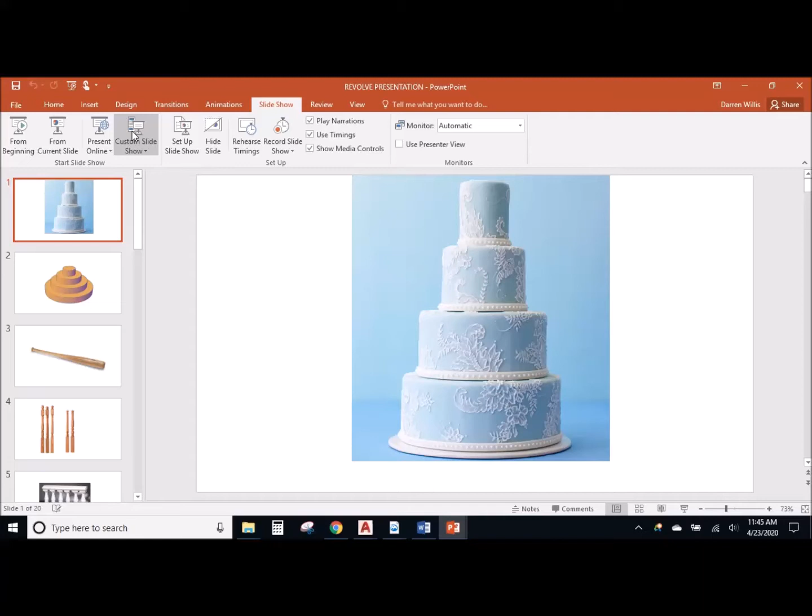Welcome to our discussion on revolved models. And what I wanted to ask you to get us started is, what do you think? Do you think it'd be possible to model the basic shape of this using the tools you already understand and know how to use? For example, you know how to extrude. So could you make the basic shape of our little stacked cake here, our wedding cake, with extrusions?

You don't have to worry about the frosting and the lacy looking stuff. I'm just talking about something like this. Would that be possible to do with extrude? What do you think? Well, if you said yes, you're right. You could do this with extrude. All right, so let's talk about it.

We could hop over onto model space. We could draw a circle with a 6-inch radius. And we could draw a circle with a 4-inch radius. And we could draw a circle with a 2-inch radius. And we could draw a circle with a 1-inch radius. Right. And you know all about extrude.

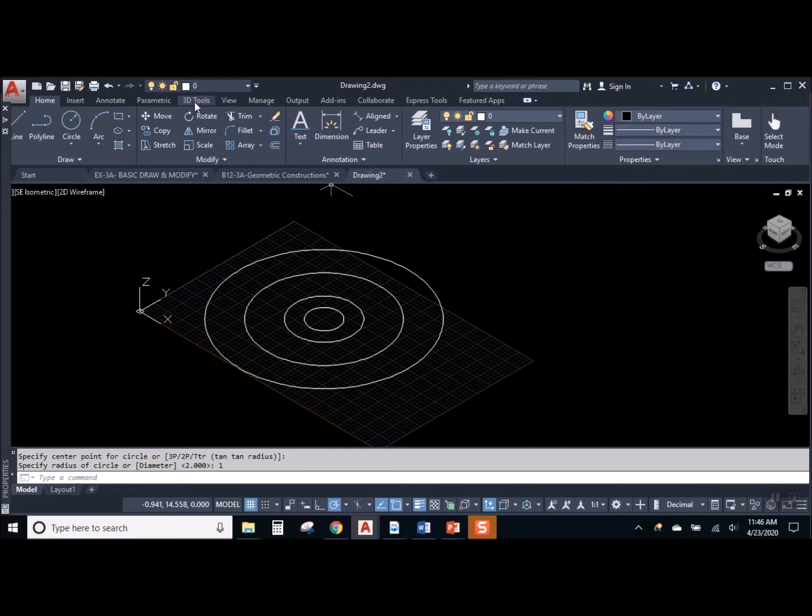So you can go in there and you can pull this guy up nice and tall. And then you could pull up the next one nice and tall, and the next one, and the next one, and we could create this basic shape and this basic idea with 4 extrusions.

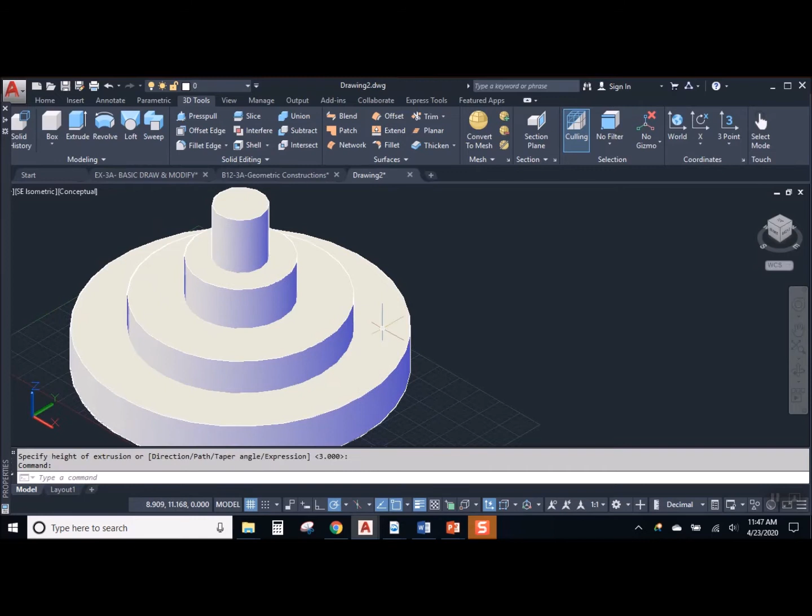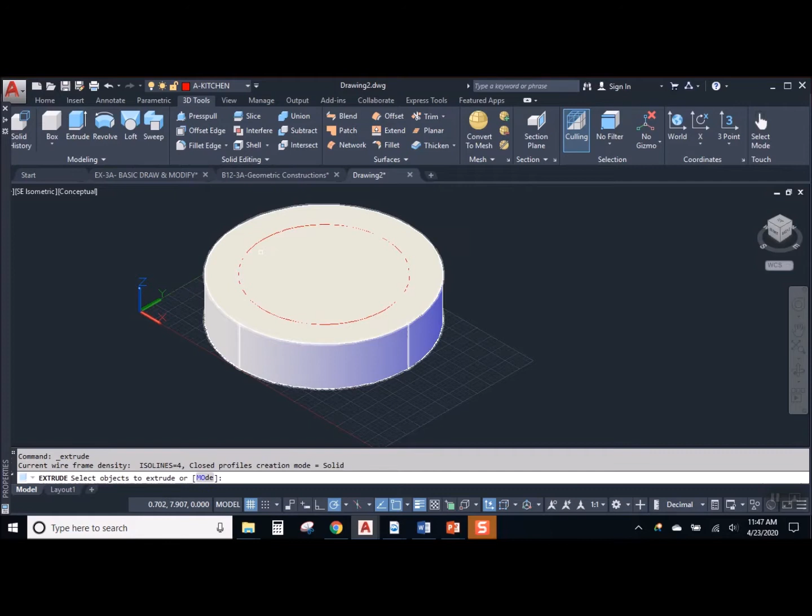Or maybe if you didn't like that, you would start off with the lowest level, just like a baker, right? And pull it up, and then maybe we go in and draw another circle on top of it, because you can do that, right? We could go to the center and draw a second circle and extrude that one up. Okay, and build one on top of the other.

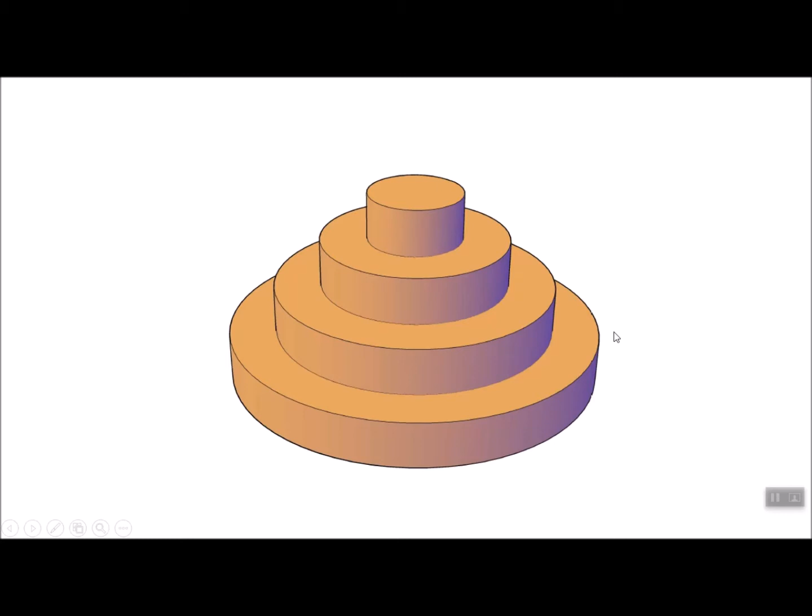So the fact is, yes, you could do this. Okay, this is not an impossible task with the technology that we have. But it's not the easiest way to make a shape like this, because this shape is kind of special. This shape is called a revolved shape. If that's the first time you've heard that term, revolved, that's okay. Revolving allows you to make shapes that are not possible to make with extrusion.

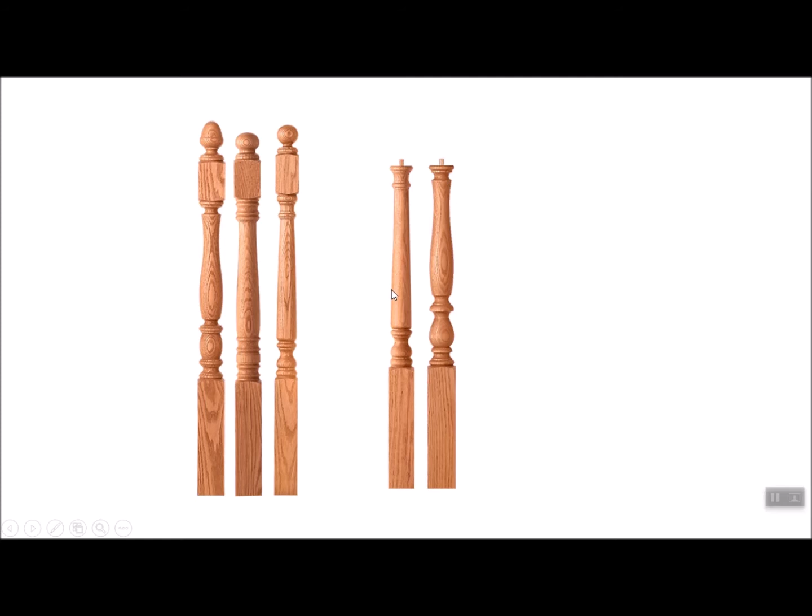For example, the baseball bat here. This shape has an axis going through it, and it has the same curve and profile all the way around, making it a revolved shape. Okay, you can't extrude this. There's no way to make this with extrusion. The curvy parts of these balustrades too for a railing, same idea. It would be impossible to make the curvy parts with extrusion.

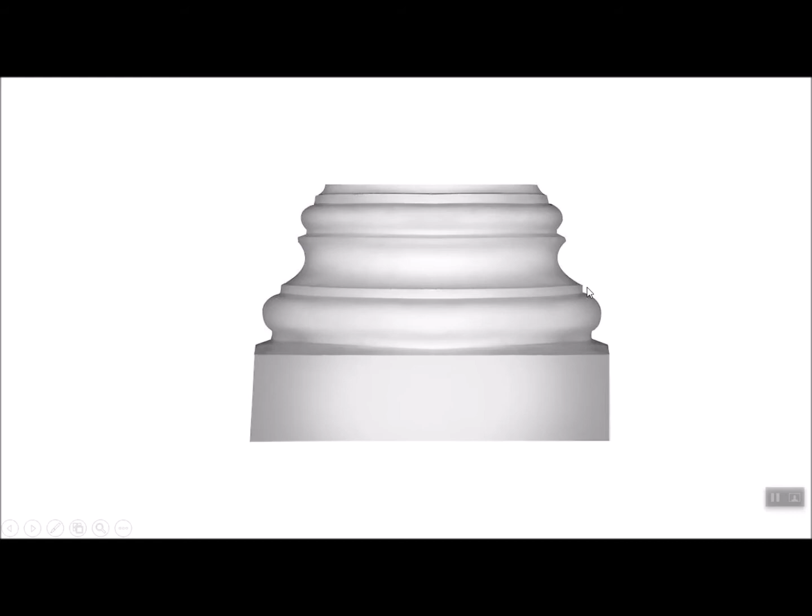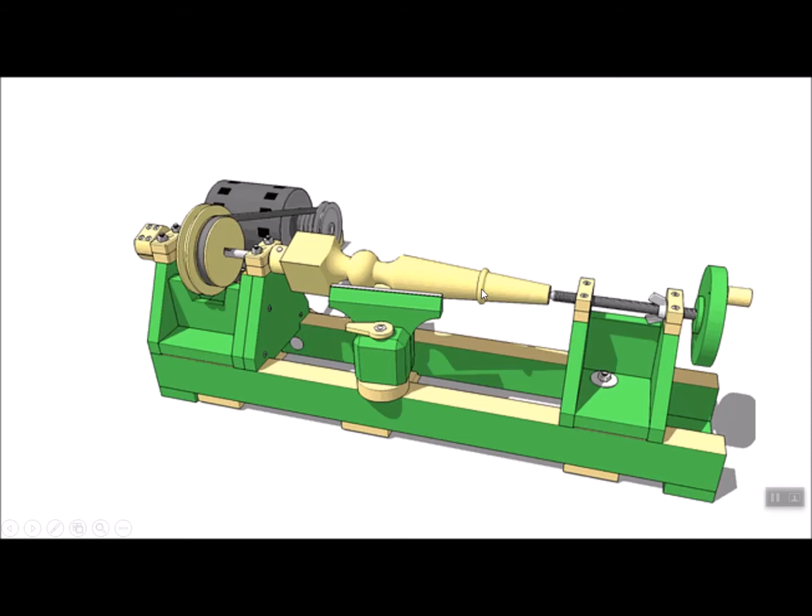So here's the basic idea. You could take a tool called a lathe, and a lathe spins around a piece of wood or a piece of metal and allows you to carve a revolved design into that piece of wood or metal. So we think about like a chair leg, right? That would be an example of this, or any of those other things we just looked at.

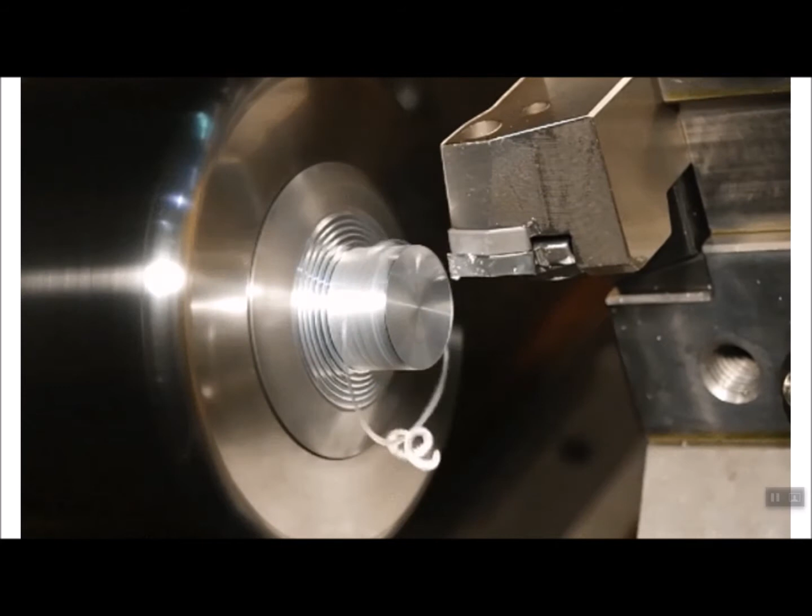Here's a lathe in operation. We see the metal is spinning on the left side in a chuck, and a cutter goes in, and then one pass at a time carefully removes material, creates some cool looking little chips, and then when we're done, we get the final shape we were looking for. These are all revolved shapes, meaning they have an axis of revolution through their center, and they have the same contour all the way around.

Okay, so the term revolve refers to the tool, a lathe, which revolves a piece of stock so that it can be cut into a different shape. There are other manufacturing processes that mirror this too. Think about glass work. Have you ever seen anyone blowing glass? Like making something out of glass?

They heat it up on the end of a tube, right? A piece of glass, a big chunk of glass, and then they spin it and blow into it. And as they're doing that, it creates the hollow of the glassware.

Okay, so these are all shapes that are not possible to be made with extrusion, but can easily be made with a revolving process. Even the sphere. You can't extrude a sphere, but you could take a circle and spin it around and turn it into a solid. Okay, so what we want to talk about is how do you do that? How can we accomplish this? And let's talk about using a new modeling tool in AutoCAD to get this done.

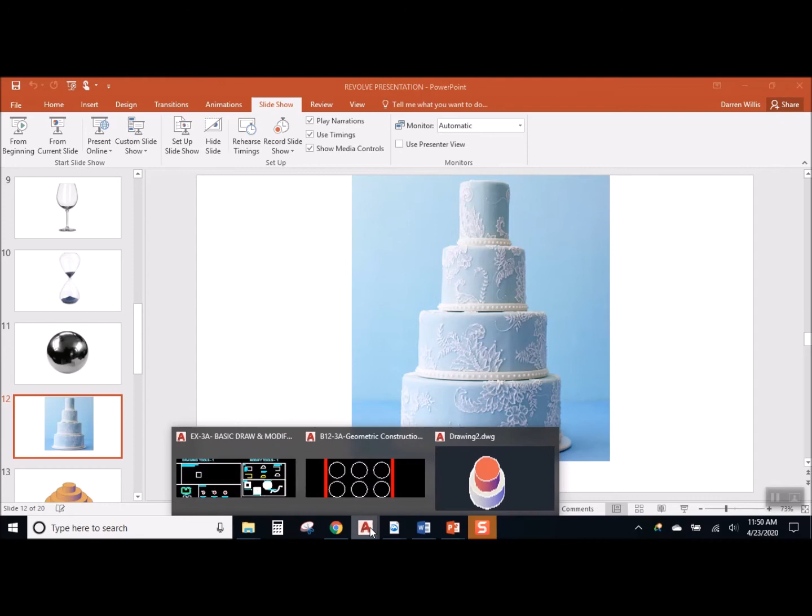So the modeling tool is not going to be Extrude. It's going to be the tool right next to Extrude. It's called Revolve. Okay? And probably the best way to start working with it is we are going to think about what's the shape we're trying to get and what do we need to draw. So looking again at our wedding cake here, what's the shape we're looking for? Well, it looks like 4 steps, right? And on the other side, it looks like 4 steps coming down.

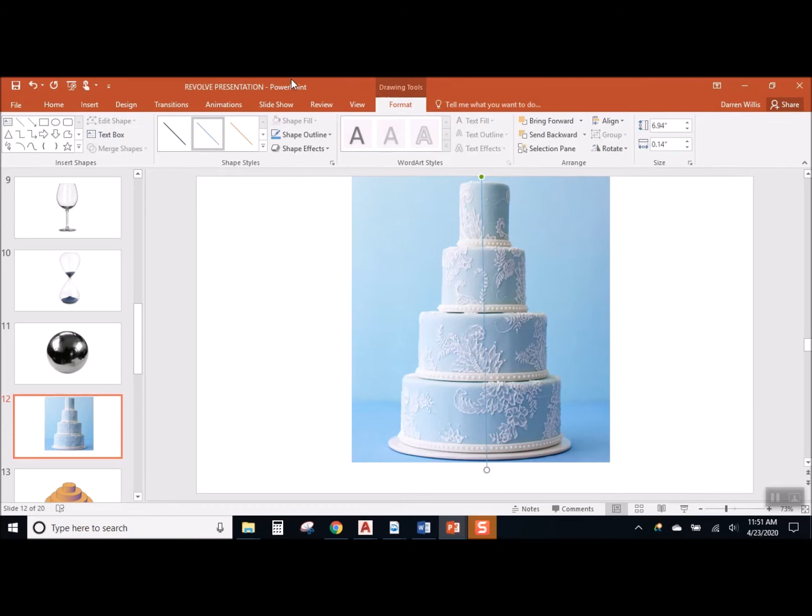But the reality is we don't need that whole shape. We only need half of it. Okay? And by half, here's what I mean. Draw a line down through the center, and then draw half of the shape you want. Because think about it, that shape is going to spin around, right? So we don't need to draw the whole thing. And actually, if you try to draw the whole thing, it'll mess you up.

So with a polyline, let's start drawing. And don't worry about sizes so much, let's just work with the concept. Let's make 4 steps, right? And if you have to go back, that's fine. We just want to create a closed polyline that defines half the shape we're looking for.

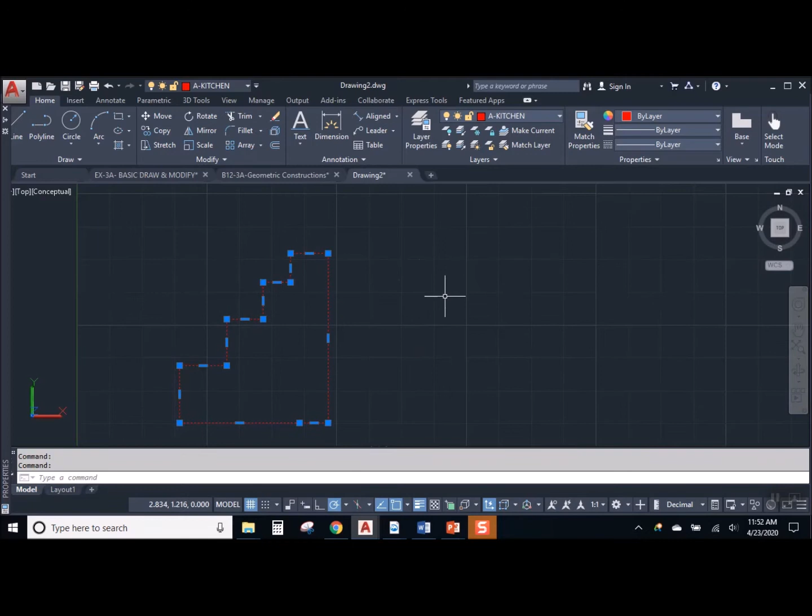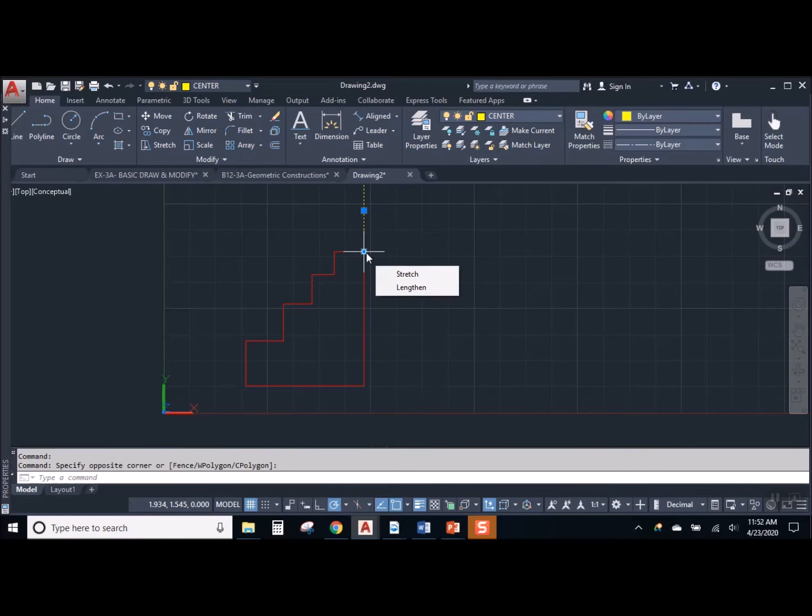Okay, and then sometimes what I like to do is add a center line. A center line is a good thing to have because it reminds you of what you're going to use for your axis. So this is half of the shape of the wedding cake, and this here is the axis. I'm going to spin that shape around. Okay, and then looking at it in 3D, we'll be able to fully appreciate this. I'm going to make a copy of it.

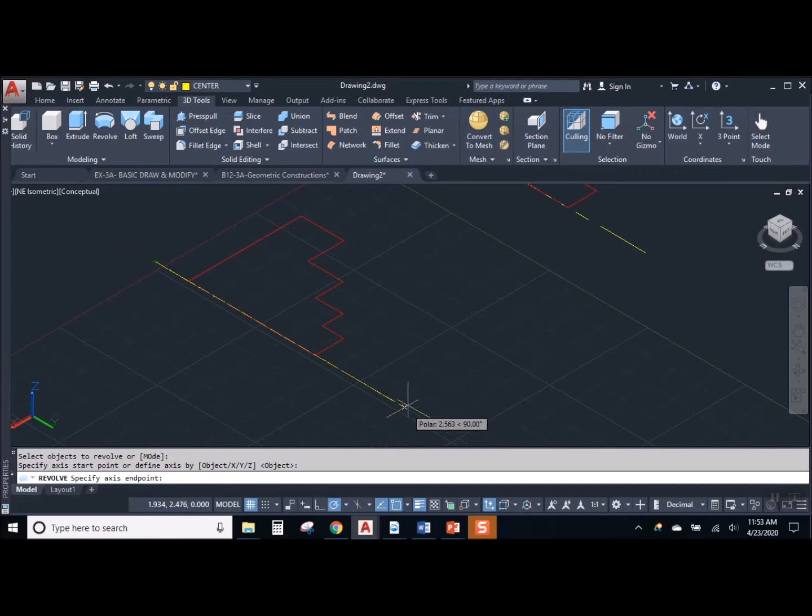I'm going to go to my 3D tools and I'm going to revolve. I'm going to take that shape there, enter, and then it asks what axis do you want to revolve around. So that means I need 2 clicks. I'm going to click here, and I'm going to click here, and do you see what I'm getting? Yeah, so it's going to create a 3D solid using that profile and spinning it around that axis. So I'll just hit enter because the default revolution is 360 degrees. And hey, there's my wedding cake.

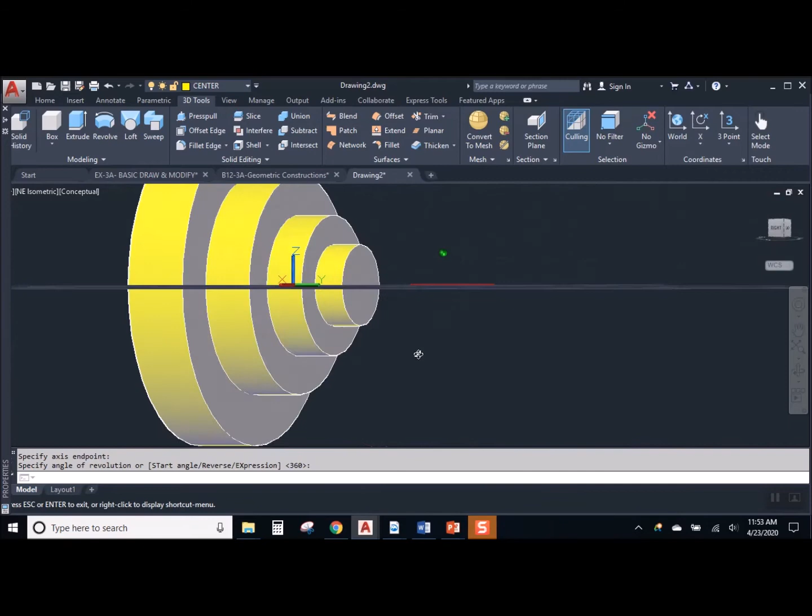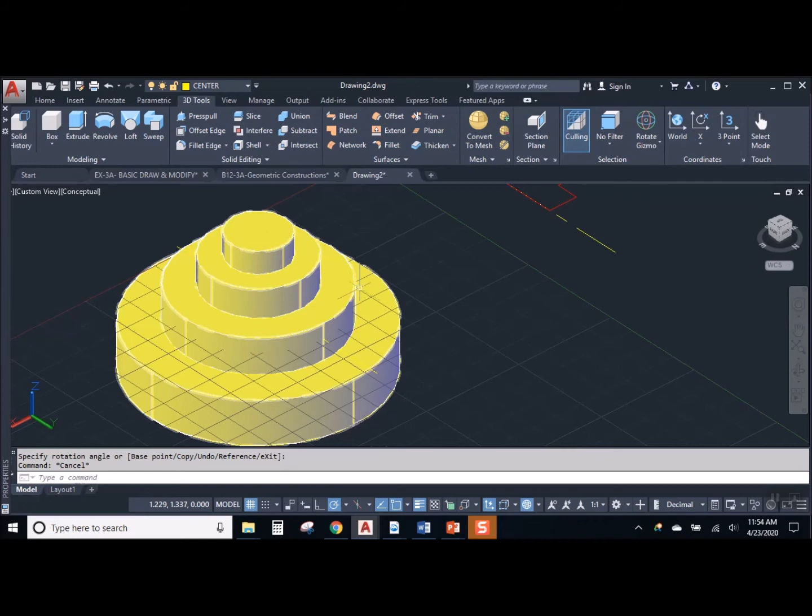Pretty fancy, right? Now, if it's in the wrong orientation, that's fine. Just turn on your rotate gizmo and then you can stand it up. And the idea is this is less work, right? Because before it took 4 different circles and 4 different extrusions to create the wedding cake. What did this one take? Well, it took 1 profile, 1 axis, and 1 revolution. So it's a better way to work if we're creating shapes that have a revolve profile.

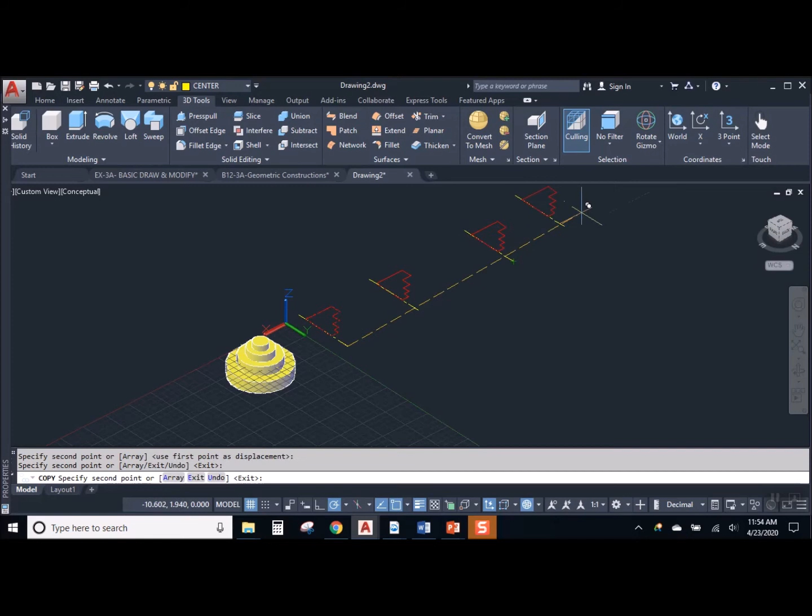I'm going to copy a few of these, because I want to show you that revolution is really a powerful tool. Making a revolve is a really powerful way to model. That's the object I want to revolve. That's the axis I'm going to revolve it around. Okay, and we get this for our result.

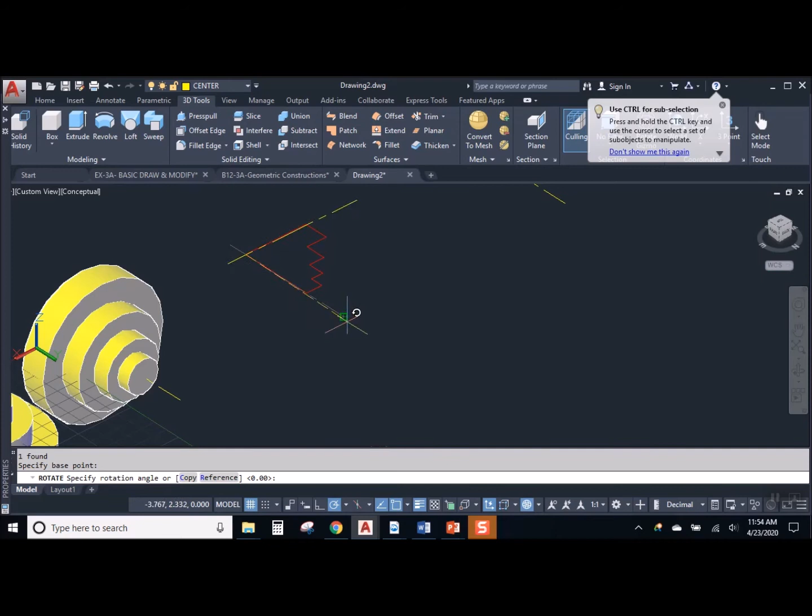Now, check it out. Imagine I took my axis and I moved it. Okay, instead of revolving around this edge here, I'm going to revolve it along that back edge there. Will I get the same result? Let's take a look.

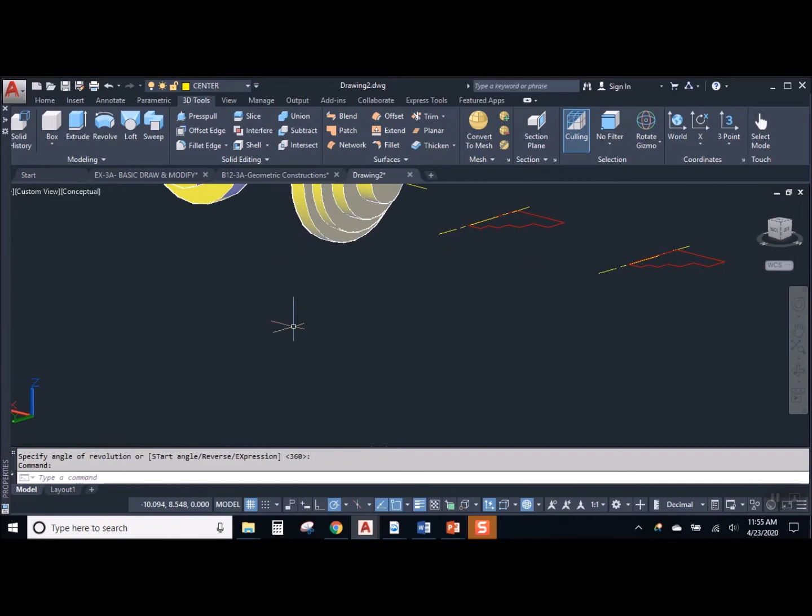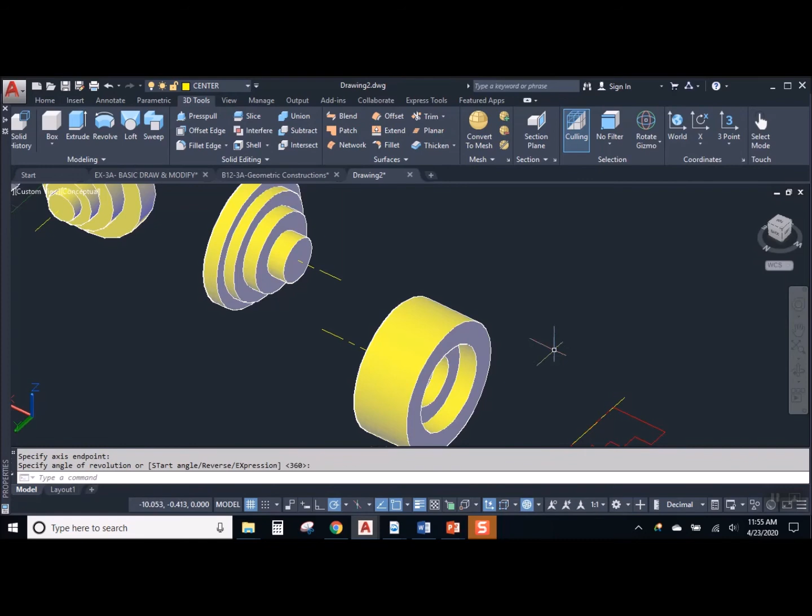See, I get kind of the same thing, but different sizes because now it has a different axis. Okay, and then think about what if I took my axis of revolution? What if I rotated it up here? Right? What if that was my axis? So I'll revolve that shape along this axis. Whoa, that's massively different, right? It's still got steps, but now they are going in. They're concave. Cool.

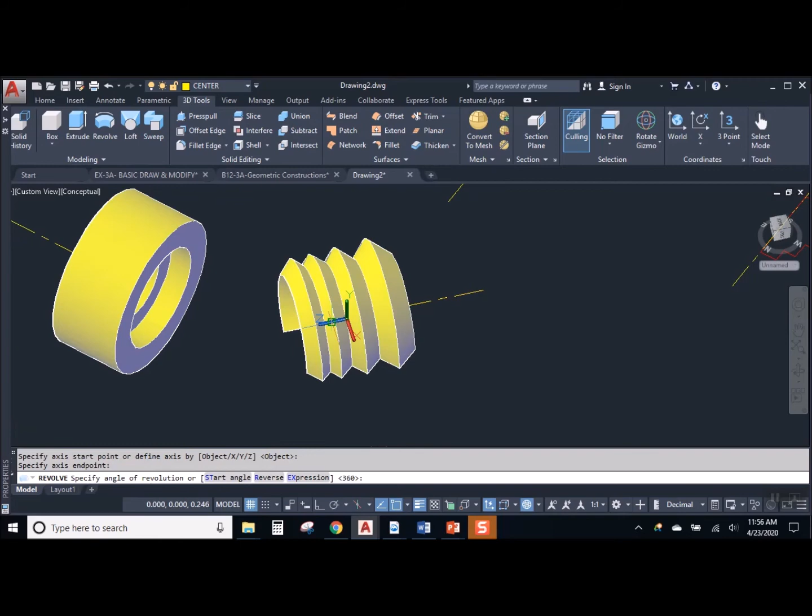And now, if I took that axis, and again, I just love doing this, so I'm going to make a couple more copies. What would happen if I took this and I rotated the axis at 45 degrees? Right, 45 degrees. And we'll do an REV, revolve. We'll revolve on these 2 points for the axis. Now that's cool, right? That's something totally new and different.

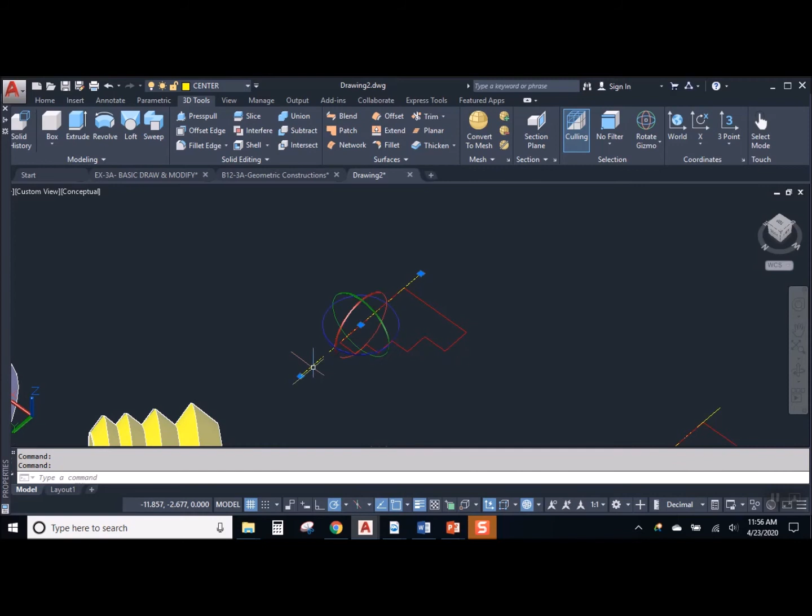So the axis is critical to the final product. All of these use the same exact profile, but we're getting massively different results by varying the location of the axis. Now here's another one. This time though, I'm going to move the axis. I'm going to move it away from the object. Okay, now think about this. It's still going to revolve, but it's going to revolve using that as the axis. What do you think is going to happen when it's done? Am I going to get the same result that I got here? Let's see.

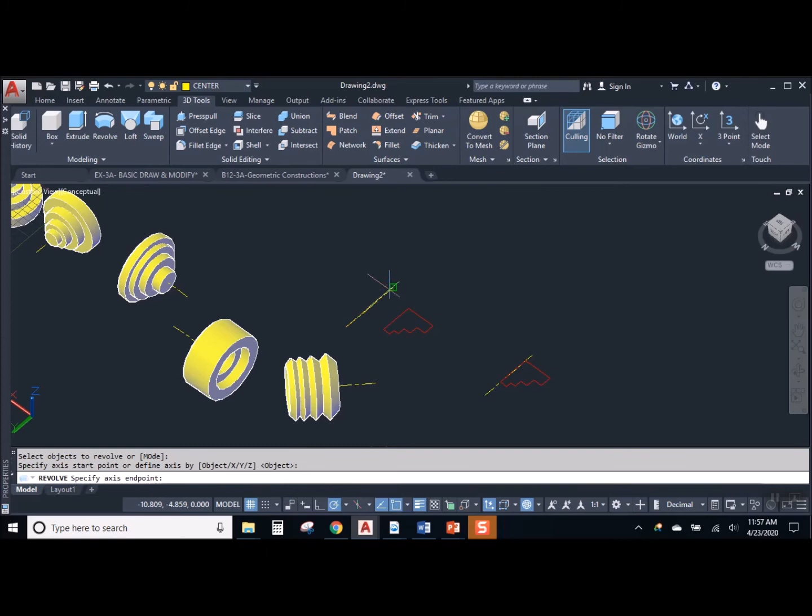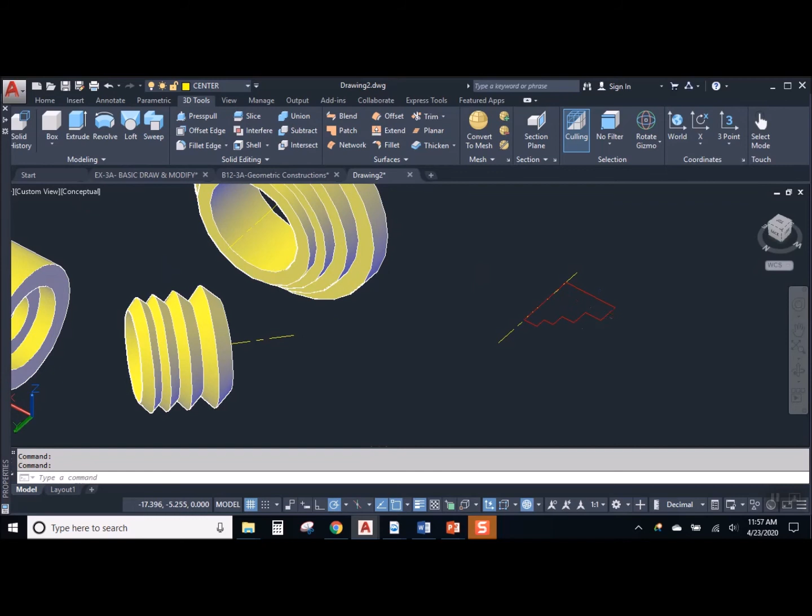Okay, so now this time, there's a big hole in the middle. Well, why is that? Well, because the axis was not touching the edge of the profile. So it leaves a gap. Alright, so that's a revolve with a space between the axis and the profile. So revolve is a very cool tool. Lots of awesome stuff we can make out of it. Why don't we play around a little bit with this, okay? Why don't you go in and let's see if we can make some stuff using revolve.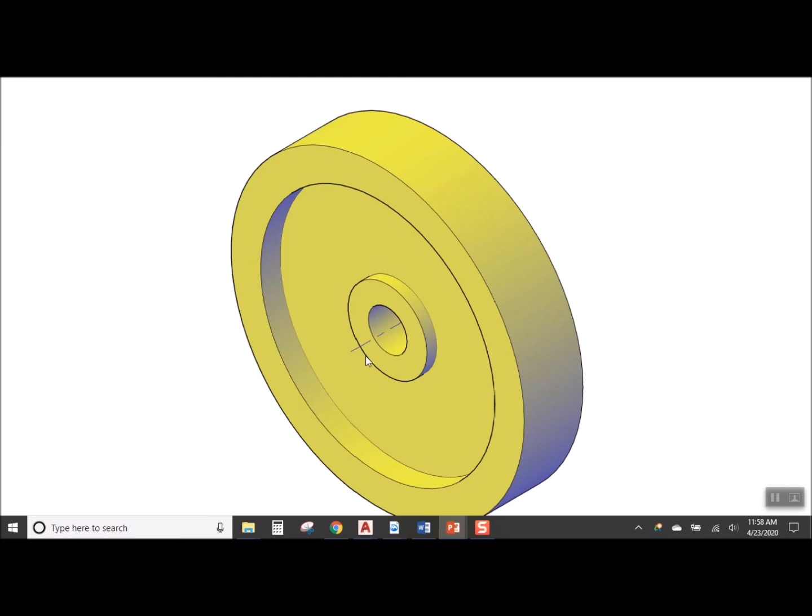So if you're kind of drawing a little bit of a blank, that's okay. How about something like this? This is the center of the revolve, the axis. There'll be a gap between the axis and the edge of the hole. That's the edge of the hole. Then there's a small raised section, a depressed section, and a larger raised section. So it looks like the letter I sideways, right? All right, let's try that.

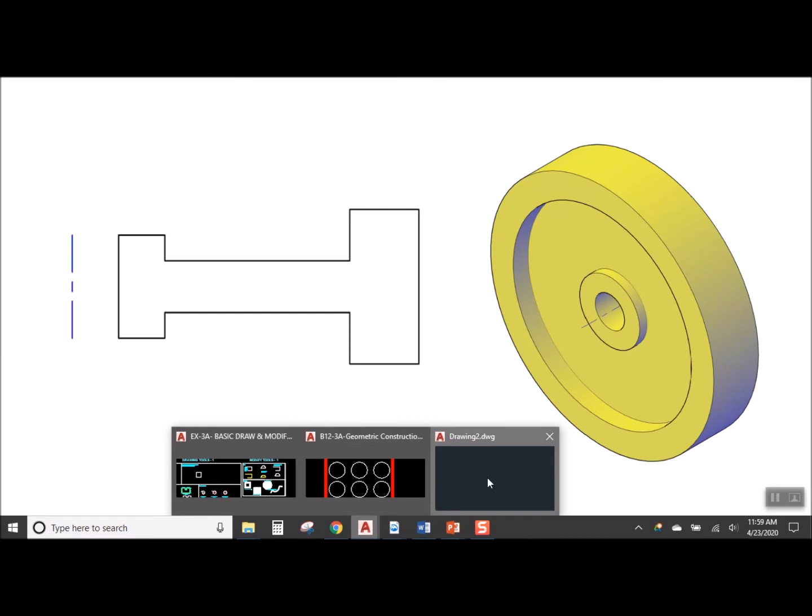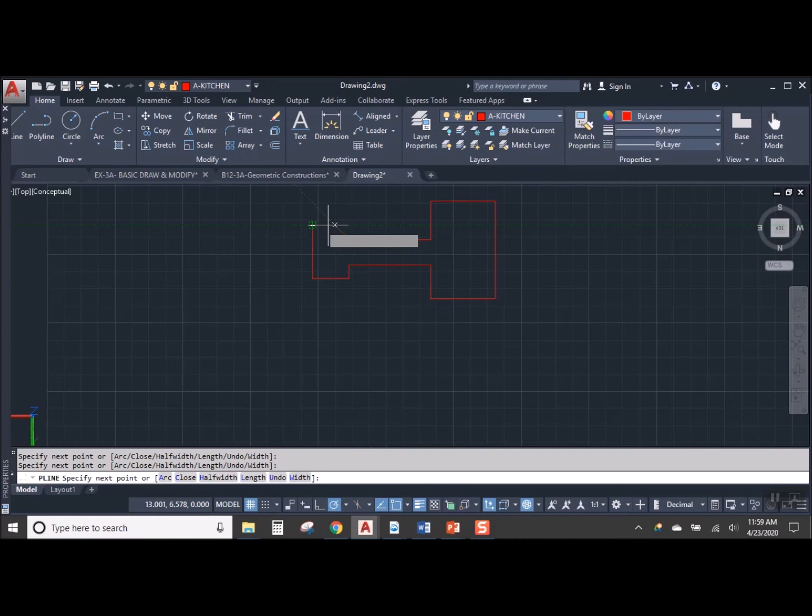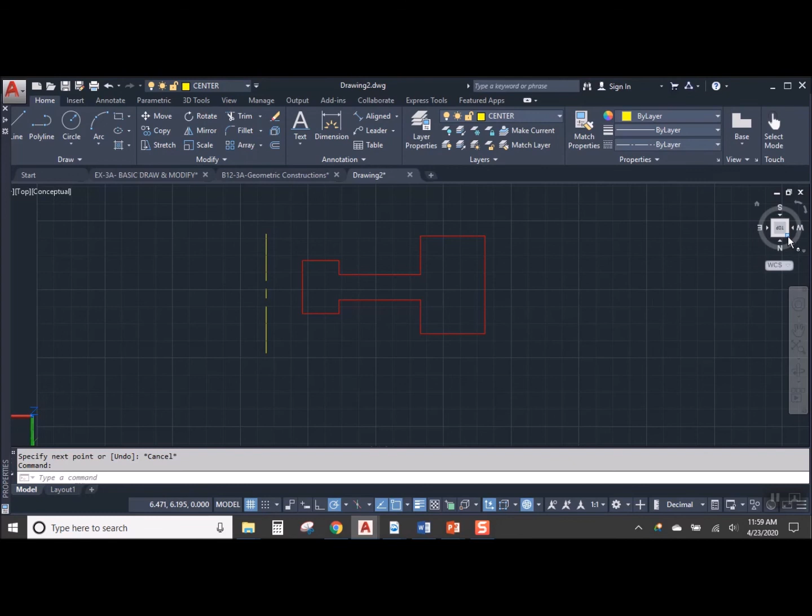I'm going to set up my profile. And again, not worrying too much about actual sizes. Focus on concept. We'll get the precision and the exactness of it later on once I get the basic idea down. I'm going to set up center line for my axis. I'll put it over here. Right, and is that what we're looking for? Pretty much. And then what's going to happen when we do our revolve? Always like to look at this stuff in 3D. REV, revolve that polyline around that axis, and then there we go.

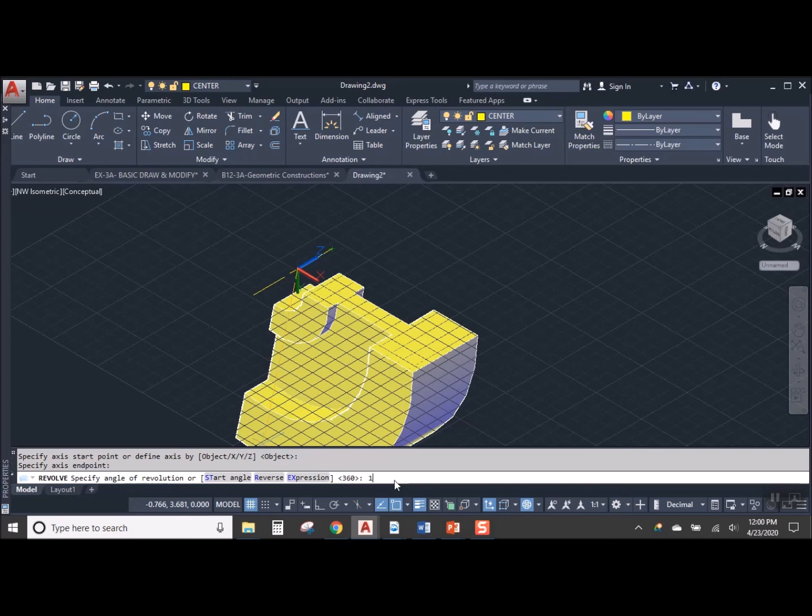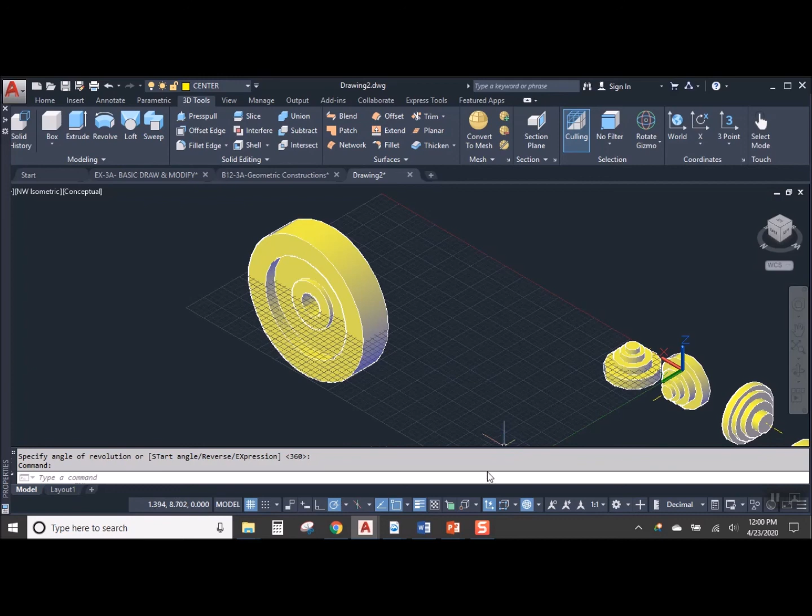Okay, so now you should know that right now it's asking for how much revolution do you want? 360, 180, 90. You can revolve as many degrees as you want. The default is 360. But if you say, give me 180, well, you get half of the revolve, right? And if you gave it a different number, well, then you would get whatever angle you asked for. But I'm going to go in there and say, give me a 360 revolve on that axis. And that sets me up for my first model. All right, looks good.